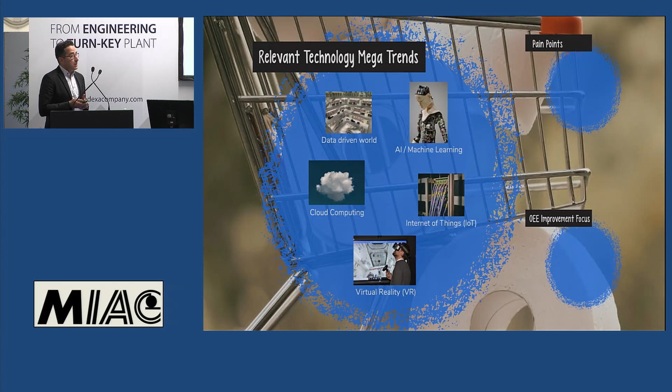We will see how to apply machine learning, artificial intelligence, cloud computing - having a solution in the cloud where you can innovate very fast and profit from new innovations. Internet of Things, so collecting data from different machines, as we will see, and of course virtual reality.

And looking at the industry, in tissue you have of course the challenges from the market. Last year COVID gave some of you a boost on the consumer part, really the demand for toilet paper. But on the other side, some of you were particularly hit on the away-from-home business, so that went down. Not to mention this year the challenges with price increases in raw material and logistics constraints from producers in China.

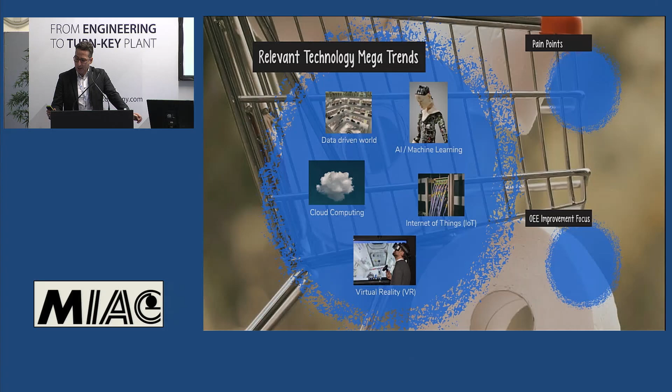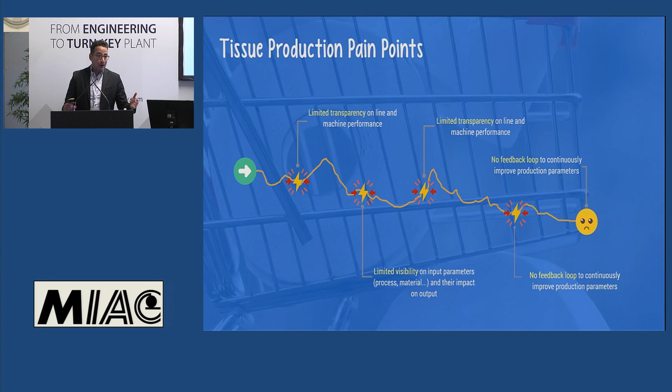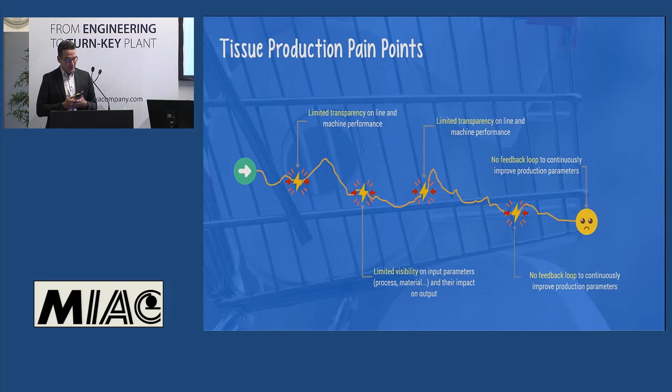And then, of course, you also have the pain points which apply to the actual tissue production process, and I hope some of you can relate to this. Starting with not having enough transparency on how the line and machine is performing, having different skill sets and skill levels among operators, which means the machine might not be running at the right settings with the right optimization. There's no feedback loop, no visibility on how the parameters play together and how they are affecting output and performance. These are typical challenges that we know from tissue production, and there are options to address those.

Independent of where you start with a baseline of 40% or 50% - I've been working on this and I've seen 50, 40, talking about the tissue converting process. If you look at the paper making process, it's probably a bit higher. But it doesn't matter if it's 40 or 50, there's definitely a potential to get you to 75%.

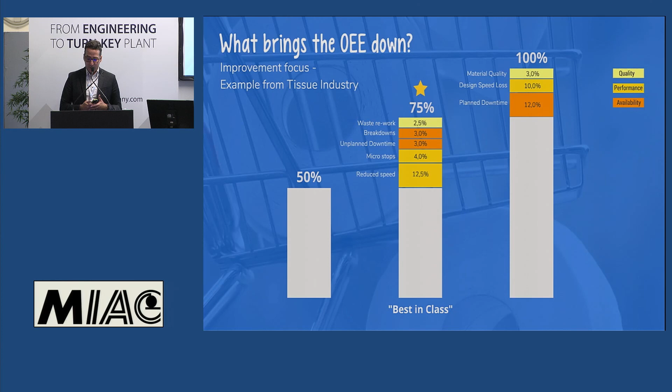You have unplanned downtime, you have reduced speed, the line might not be running at the right speed, and that decreases the performance. So this is really the sweet spot that can be addressed by applying the right technology - in our case, artificial intelligence and machine learning algorithms. By the way, this was a study we did together with Boston Consulting Group last year.

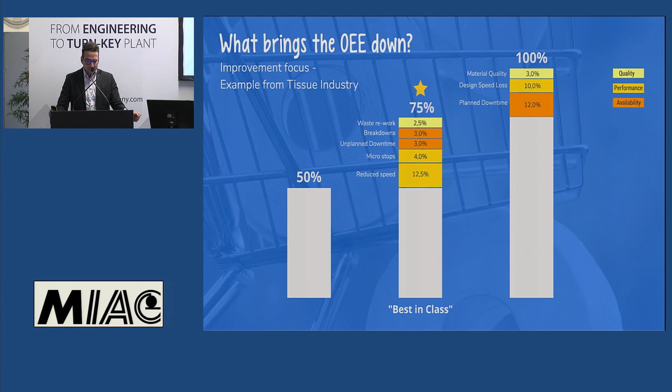So now let's see how this works. What is the idea behind it? It's pretty straightforward. We take the data from the lines, from the actual production data - you will see in another chart all the types of data we use - but basically we connect to the shop floor, to the lines, and we get the data.

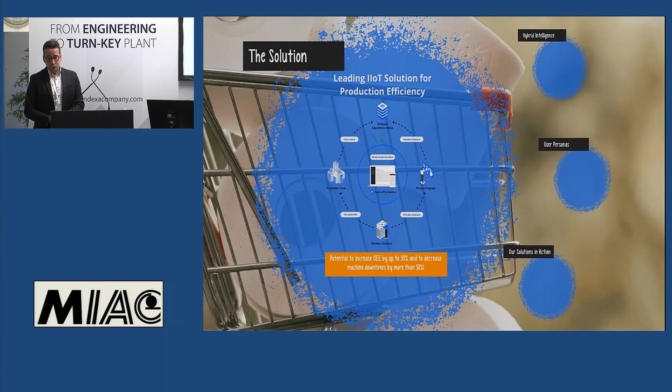This data is brought up to the cloud, and there we have our solution, an algorithm that automatically determines the optimal settings, the optimal center lines for the production lines. This is pushed in real time to the operator on the shop floor by means of a mobile app, and this happens all the time. When the operator applies this recommendation from our machine learning algorithm, they experience a significant increase in the OEE - we are seeing up to 30%, so this can be significant.

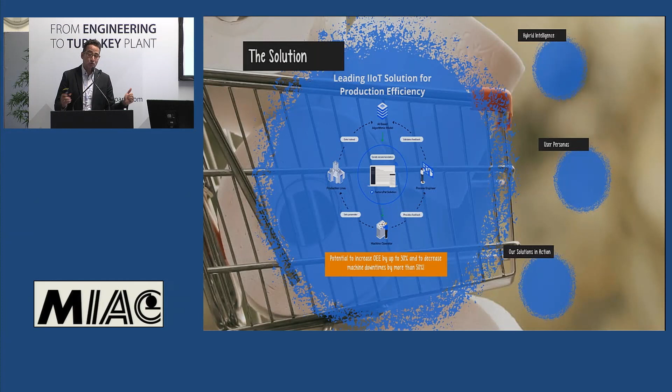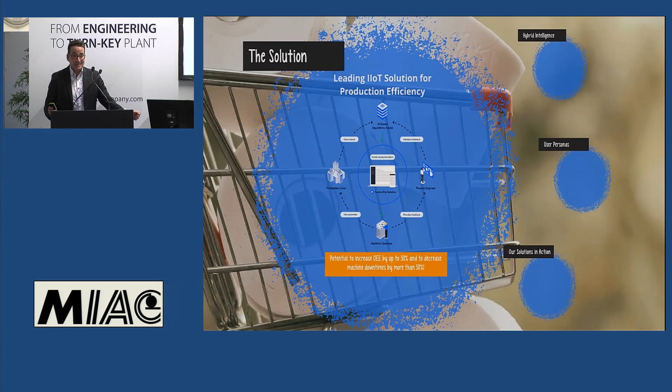We also see a significant reduction of the downtimes of the machine. The planned downtimes are planned, so nothing much can be done, but reducing the unplanned downtimes is huge, and we are already seeing up to 50% with our existing customers. This is actually in essence the solution, and I will show you how that works.

So we are talking about hybrid intelligence because the algorithm learns from the knowledge of the operator. The machine learning algorithm learns what has worked well in the past, so it learns from the experience of the operators and improves that and pushes that back. Of course, there's also big data and IoT, Internet of Things, really collecting data from the machine directly. There are many ways to do that.

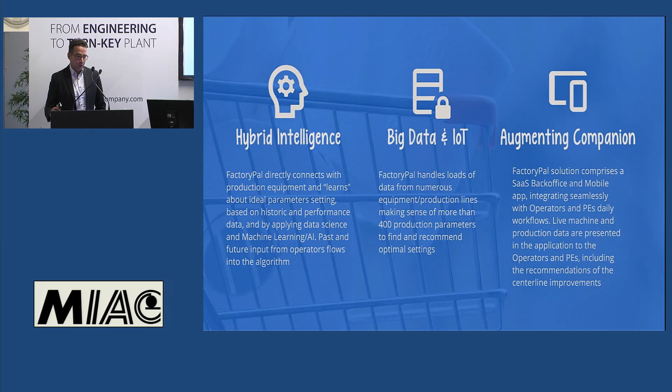And it's also an augmenting companion because we put a mobile device in the hands of the operator for the first time. So it becomes a tool in their normal daily workflow, an augmenting companion.

There are different functionalities. Just very quickly, on the right we have the operator, and on the left side we have the process engineer. On the right side, the main feature for the operator is the guidance.

You can think about it like Google Maps that helps you drive from A to B. This solution is really guiding you, the operator, showing what to do in terms of setting the machine and running the machine.

And because we are collecting the data in real time, you can also see the shift KPIs, the current work order, so which product is being produced with which specs. It's also something the operators appreciate because maybe it's manual now, and they can have it for the first time electronically.

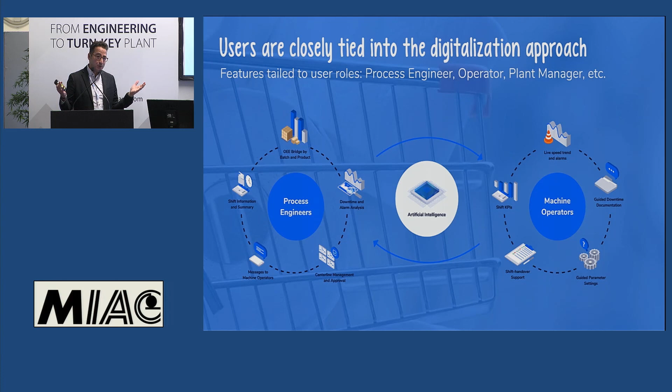And the process engineer has a view, an application running on a browser, that shows them the recommendations we are doing and also manages the centerlines from the algorithm. There are other features, but I will skip that and move on.

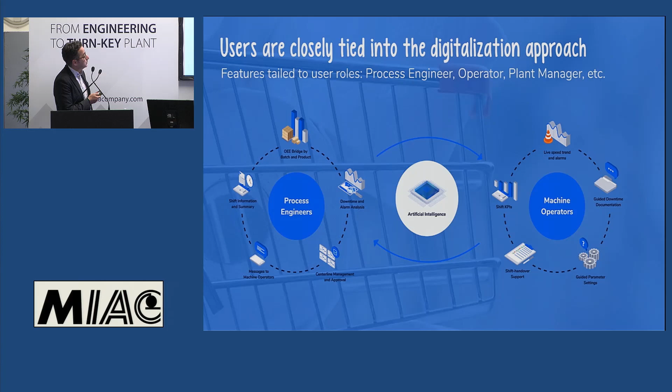This is just now showing some screenshots of the mobile app. You can see here a line. The line can be, we are vendor agnostic, so the solution works independent of which vendor is being used. This is a typical converting line where you have the different machine parts: the rewinder, the unwinder, the embosser, the tail sealer, and then after you have the packager.

And you can see here a screenshot where the solution is recommending changes, and this is very specific. For example, here we are telling the operator to change the pressure danceroll from 3.3 bar to 3.5 bar. So this is very specific.

And the operator normally accepts that recommendation. We will know that the operator accepted because we are reading and seeing what's being done on the HMI, the human machine interface from the machine. You can see the picture there on the right.

But if the operator rejects it, there might be a good reason why she or he does not agree. We want to capture why it's being rejected, and this information also flows into the algorithm to improve over time.

You can see here the recommendations are specific to the different machines, the rewinder, the unwinder. We also not only capture and recommend electrical parameters, we also recommend mechanical settings, which is also important in the converting process. For example, here we are saying on the embosser to change the embossing roller nip to 43 millimeters.

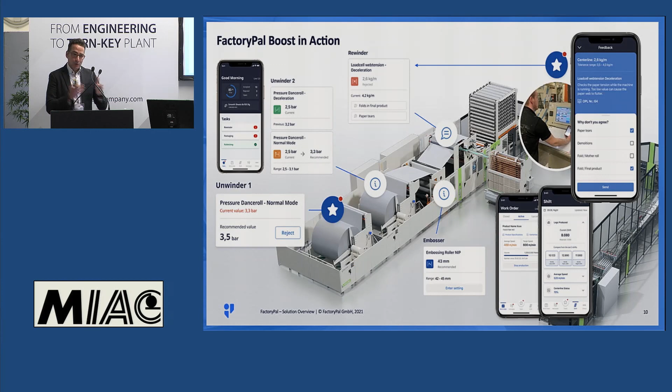And on the right, you see some screenshots showing the KPIs, what is the actual status of production based on the work order, and on the left you can see the welcome screen, the home screen. You can see here we cover the line end to end, so it's not only the converting part, the rewinder, we also can tackle the packaging and the palletizing.

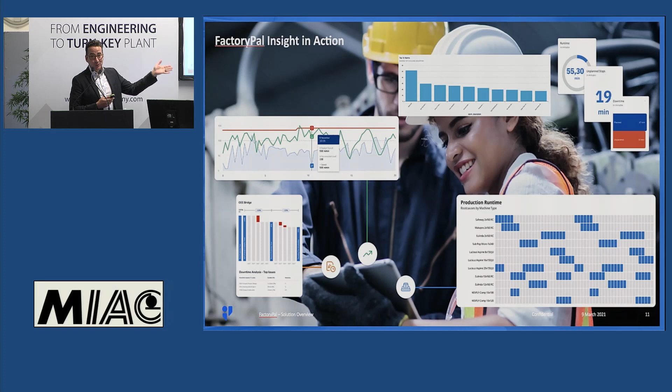So the recommendations on the parameters are also related to that. Obviously, there's also a lot of dashboards, visualization and analytics. When you collect all this data, you can really generate a lot of insights based on it: what are the top parameters being changed by the operator at the OEE bridge, where you're losing time, where your speed is decreasing, and so on, and also some heat maps.

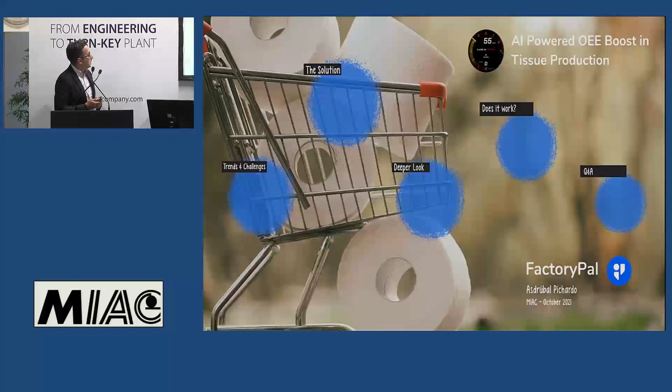So just to give you a flavor of how the machine learning, or how the magic works, I refer to this as our secret sauce. So really, we collect all possible parameters, and there's technology to do that today, so it's not new. The more parameters we get, the better.

In the case of a tissue converting machine, it can be anything between 200, 300, 400 parameters. Our data scientists have already determined which ones have an influence, which ones have an impact to move the needle in the right direction. In this case, we're talking about between 30 and 40 parameters. So the recommendations of the algorithm are around those 30, 40 parameters.

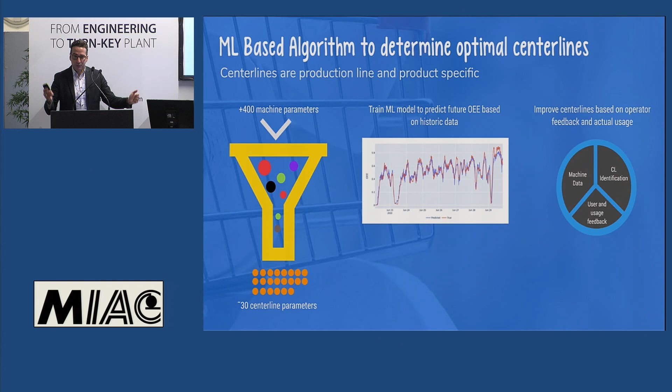And on the right, you see this feedback process I mentioned before. When a parameter recommendation is rejected by the operator, we capture the reason why, and this flows in as a learning for the algorithm. This happens automatically. So if you have a production run of 24 hours for a specific product, or 2 days, we know exactly, and every hour or every 30 minutes, there's a recommendation coming to the operator. You can also think of this as an app on the iPhone or an Android device, and you get a notification and you react to it.

And all of this only works if we are providing consulting. So we have shop floor consultants that take hands with the customers and really are there to implement and make sure that the operators and the process engineers understand and adopt the solution. Without that, we wouldn't be successful.

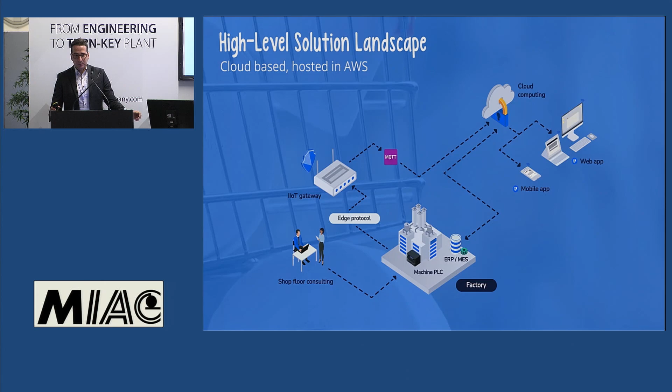This is showing you different sources of data. Obviously machine data, so the 400 plus parameters I mentioned, read directly from the PLC, the set points, measured values. Also the ERP system, I mentioned why that's important for the product specs and the work orders. And there are other sources that are relevant for us.

For example, mechanical settings, things like temperature and vibration level can also be relevant. The quality of the mother roll, depending on where you are we call it mother roll or parent reel, is also well known to have an impact on the converting process. So things like humidity and grammage, the weight of the roll, have an impact. That's also relevant information to improve the recommendation of the algorithm, and even some visual inspection data. So if the customer has some visual data capture, that can also be fed into the algorithm. It's continuously evolving.

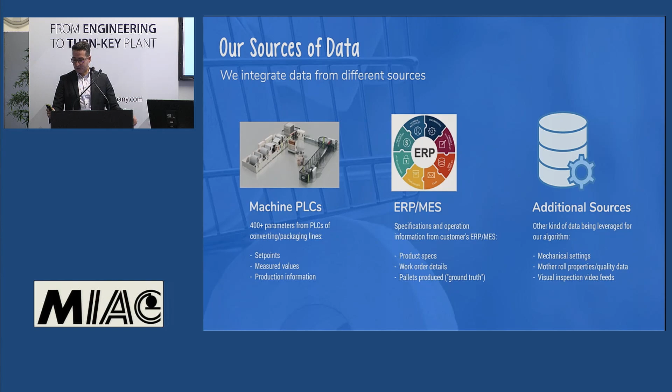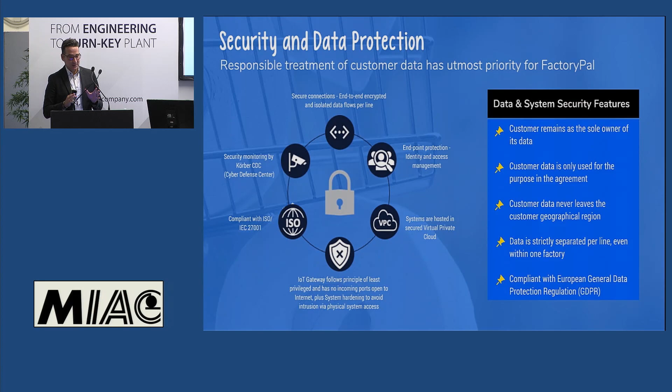Security is a big issue when we talk about the cloud, and we take this very seriously. There's a lot of features being provided by the cloud provider, in this case Amazon, but also making sure the gateway doesn't have an incoming connection into your system—it's only outgoing—and strong authentication, encryption. We are part of a bigger group and leverage things from the Körber group, for example the Cyber Defense Center. So whatever we get from Amazon is complemented by this constant monitoring from the Cyber Defense Center. A lot of things are in place to make sure the customer gets his data well protected and the required trust. If we don't take this seriously, we won't be in business. That applies to any cloud software as a service provider.

Just some evidence on whether this is working or not. This is not science fiction—we started doing this more than 1.5 years ago. We now have several customers in Europe and also very soon in North America. This is an example of one customer where we have been constantly increasing the OEE by 20-30%. We measure that also in terms of percentage points, and you can see here over 5 months in a row: 4, 5, even 8, close to 9.

So this is significant if you put the numbers together—what does it mean for a tissue manufacturer to increase the OEE by 3, 4, 5 percentage points? On the right, you see evidence of how unplanned machine stops, unplanned downtime, went down by more than 50%. In this particular case, the baseline we're comparing against is about 44%, which is pretty standard in Europe as I've seen. This is a relatively complex production, so we're not talking about one product. In this line, this customer is producing more than 9 products, mainly toilet paper, with a bit of kitchen rolls as well, but mainly toilet paper.

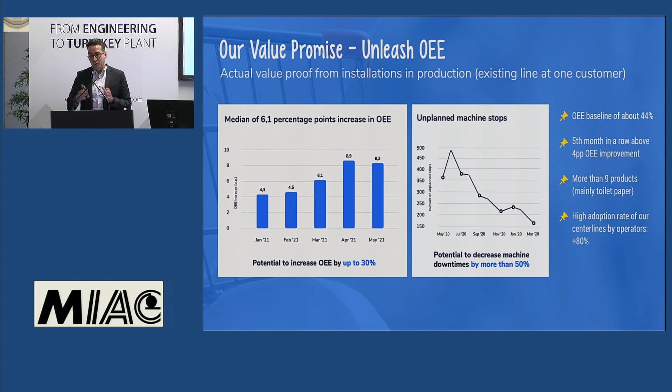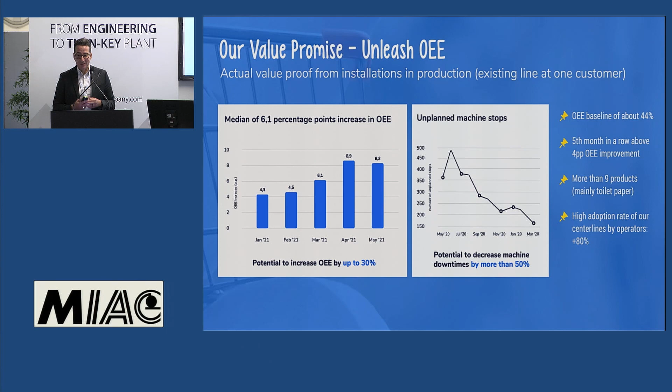It's very important, the adoption rate of the center line. We can only claim our solution is working if the operators are accepting our recommendations, so we also track that. It's a measure of the success and impact. We want to be above 75%; in this case, we have been above 80%. So the operators really believe in and are implementing our recommendations.

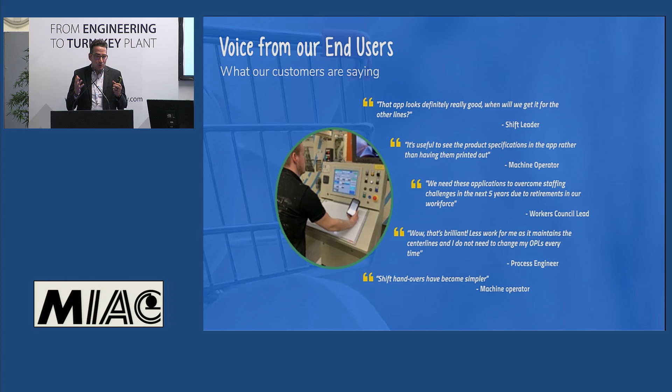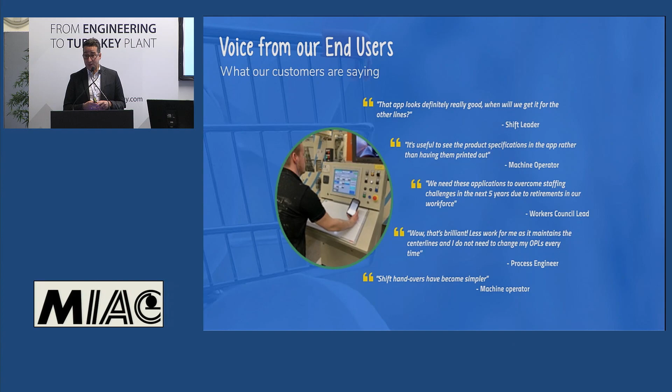Some good feedback we get from our end users is that they like it and are waiting for when this can be rolled out to other lines. Also the workers' council leads—people concerned about an aging workforce, or people retiring and afraid they'll lose knowledge—well, with this solution that's no longer the case, because the knowledge is actually in the app. So even someone new, from a younger generation, can really be brought up to speed quickly and start operating the machine from day one, because the algorithm tells them what to change, what to set.